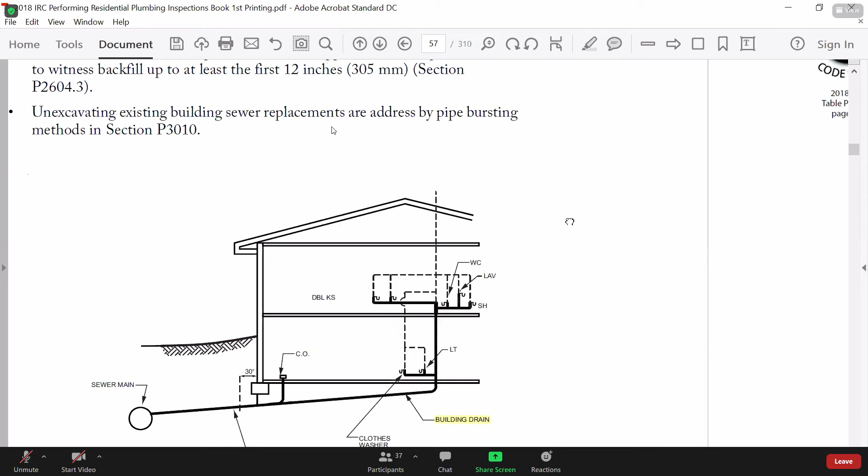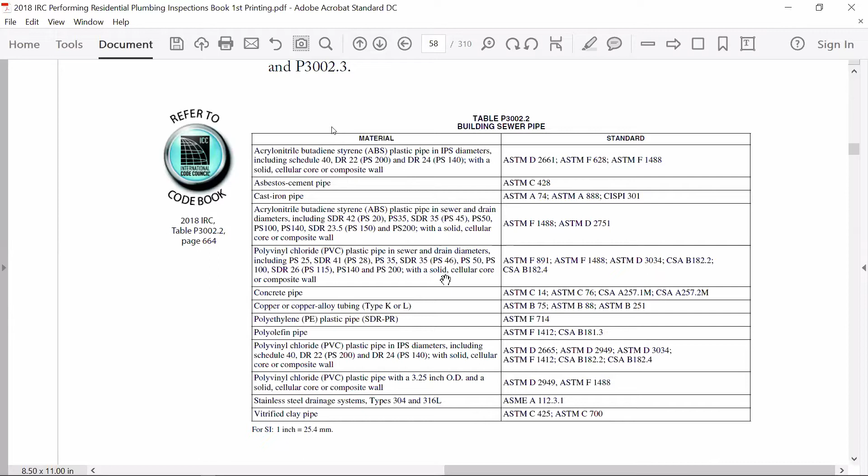So you ask yourself, step one, can I use a certain material? Here's that chart I showed you, that table, when we were talking about the water service pipe in the same trench with the building sewer. You can't use this table if you use vitrified clay pipe, remember. But if I just have a trench for the sewer pipe, not worried about the water, then I could use any material here according to this table, because it's titled Building Sewer Pipe. Where do I find this? Chapter 30, table number 3002.2 to be exact.

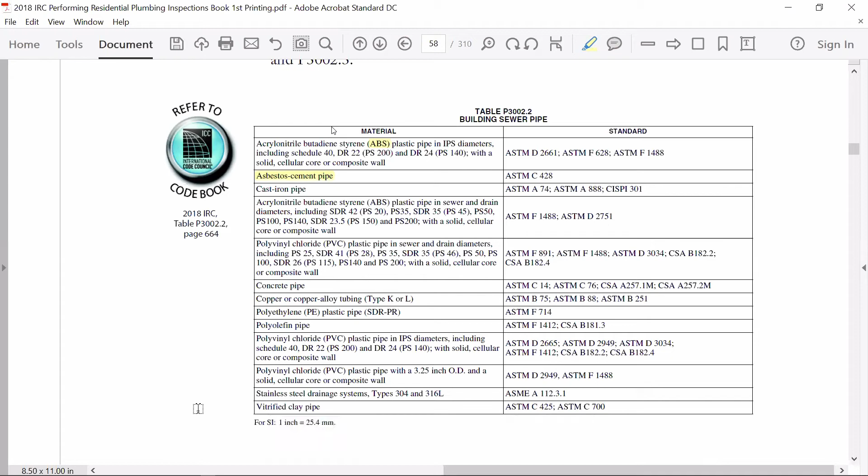So you say to yourself, what type of piping can I use for my building sewer? ABS? This has been eliminated. Somebody check this table, see if that pipe's still in there. Anybody got a code book? If you do, check this table. I think they eliminated this. Asbestos cement pipe, they may have eliminated that. All right, let me know. I'll keep on going. We could use concrete pipe, we could use PVC, we could use... hey, where's Jamie at? Jamie, are you still with me?

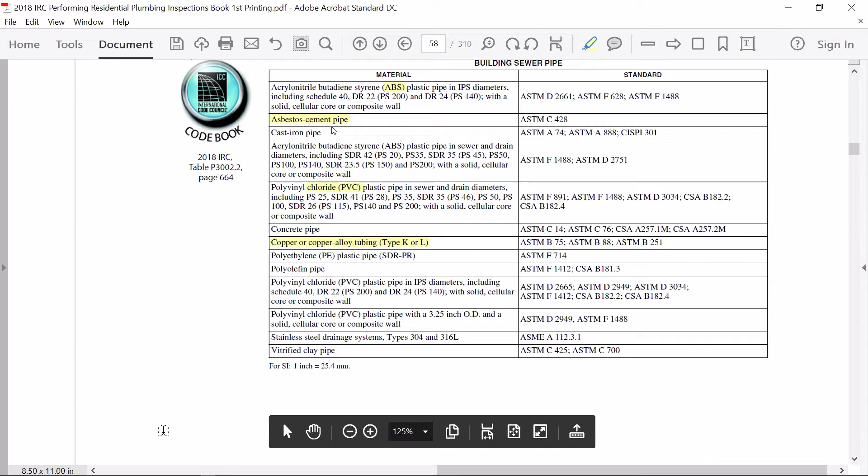Yes, I am. All right, look what I could use here for my building sewer pipe. Remember we had that discussion about copper or copper alloy tubing? Yes. Wouldn't that be an expensive sewer pipe to be used, copper? Like 3-inch pipe? I would imagine so. Yeah, but you know what, I could use K copper, I could use L copper, but you see what's missing here, Jamie? I can't use WK or WL, right? Welded seam cannot be used here. Yeah, very good, it's like it has been eliminated.

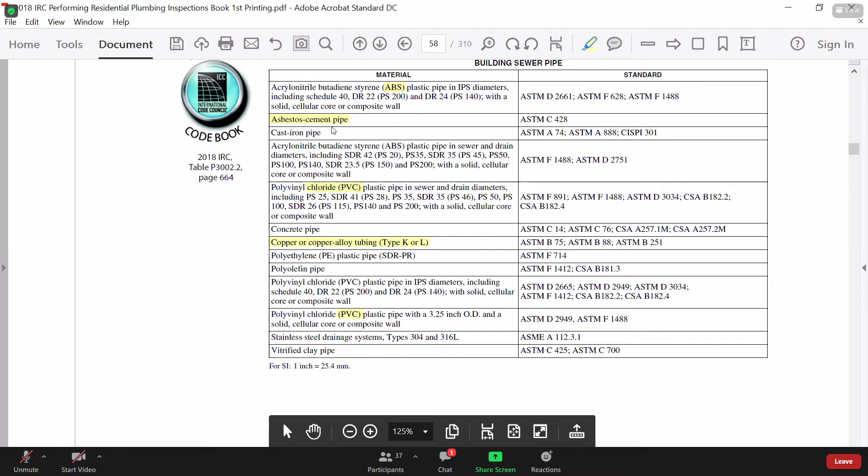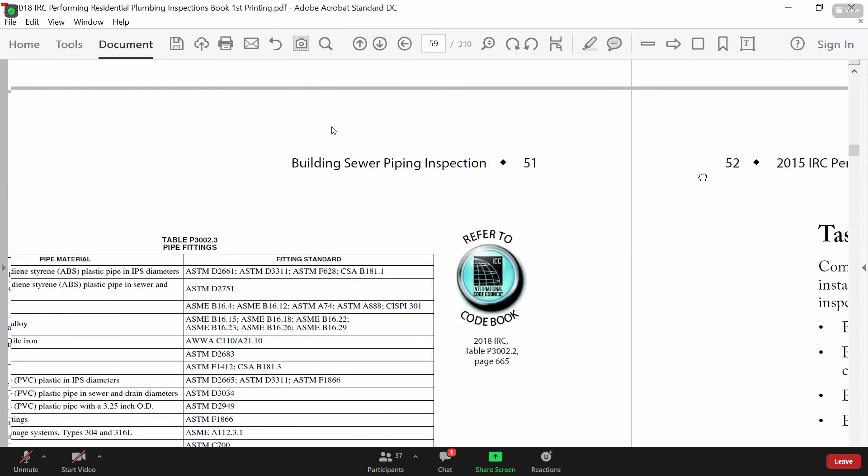Paul, go ahead. The asbestos has been eliminated. Yes, and M has been eliminated too. Excellent. So as you can see, these are the approved materials that we could use for building sewer pipe. As we go along, here is the pipe fittings associated with those materials, as indicated in this table, still in Chapter 30. I'm still given the pipe materials and fitting standards, and I can still use vitrified clay pipe, stainless steel, PVC, etc.

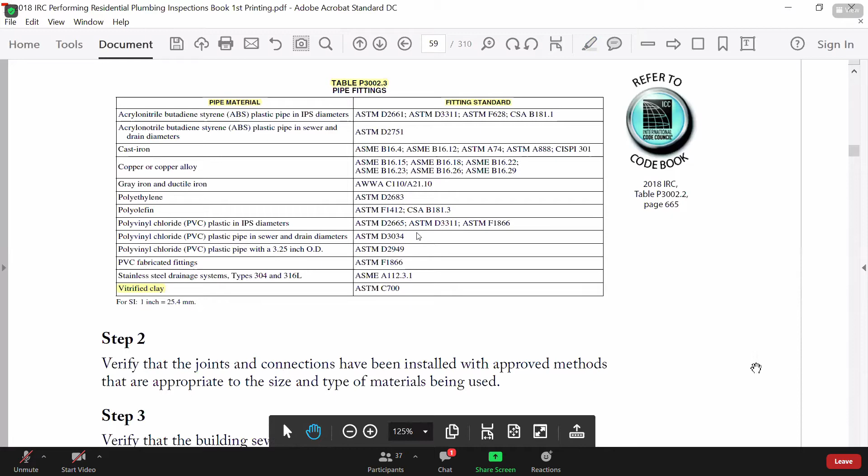Now that's your workbook. You have all this material available in the workbook, and I'm going to get into the PowerPoint here and kind of make sense of this. So we've seen that graphic, we know where the building sewer is, we know where the building drain pipe is. They are two different and distinct parts of the drainage system, right? Moving on, there's our tables, building sewer pipe, the pipe fittings.

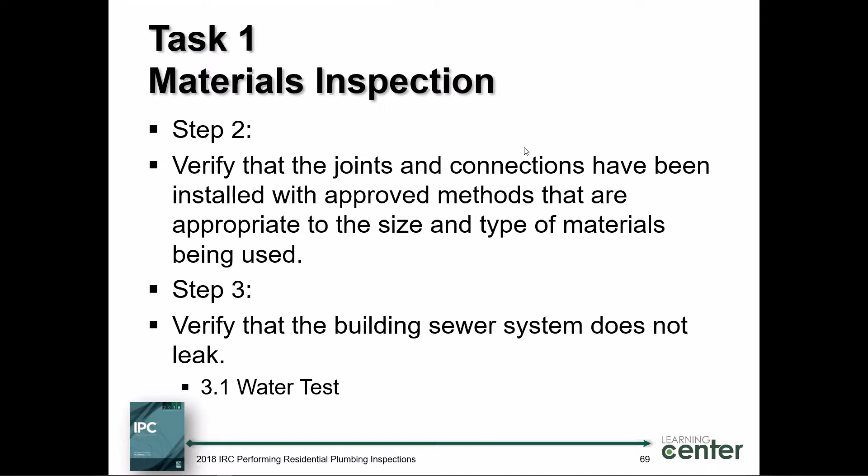Step 2, we need to make sure that the building sewer can be inspected, making sure that it is not concealed, covered, or even put into use. If I'm looking at the approved construction documents, I'm checking the pipe size, checking the slope to make sure it's sloped accordingly, and checking protection from freezing possibly. If I go to this section of the code, it gives me a little bit of insight. So basically, it's recommended that you check with the authority

that has the jurisdiction for building sewer pipe. Now again, this could be your local engineering department, maybe your city engineering department, county engineering department, maybe the building department. I don't know how your jurisdiction is structured, but in any case we're just talking about the model code here. There are no amendments to the code that I'm presenting here. This is strictly right out of the International Residential Code, Chapter 30, Section 3001.2. Here it is: portions of the above grade DWV system, other than vent terminals, shall not be located outside of a building, attics, crawl spaces, etc., unless you protect it from freezing accordingly.

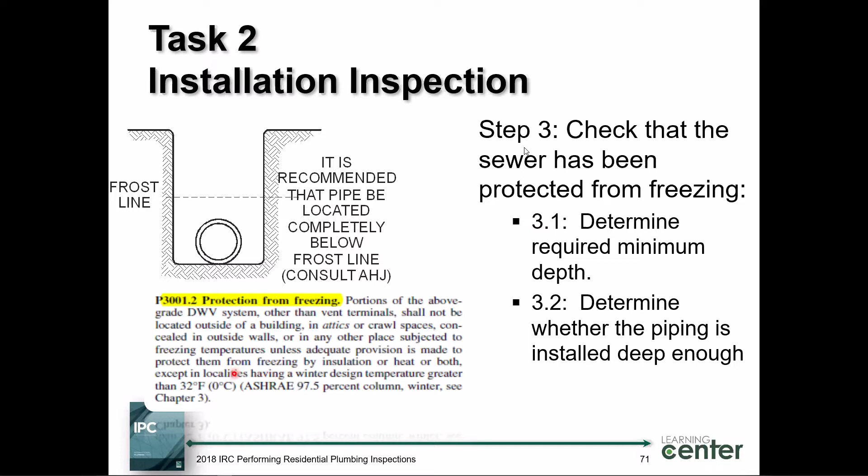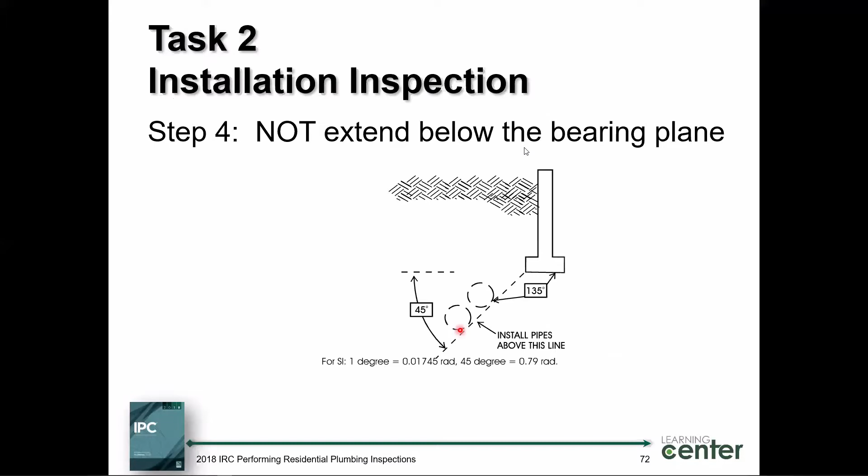Hey, does this look familiar to you? Have you seen this picture before? Carla, smile, have you seen this picture? Right, we've seen this before. We saw it with the water service pipe, didn't we? And now we're seeing it with respect to the building sewer pipe. It's the same thing. Any type of piping cannot pass below that bearing plane, because this is where we resolve the pressures of the building's load into the soil below at the juncture of the footing.

Okay, makes sense? Hey, I was on a job a few years ago, and I figured I'd take a picture of this guy. Look at this guy, he was actually putting in the building sewer system way, way up here in Lake County, Ohio, right? So I figured I'm going to take a picture of this because this is a good picture. I mean, it's the same thing.

We didn't regulate the building sewer in our jurisdiction when I was the building official. We just regulated building stuff, like when it came into the building. However, look what happened here. He put really nice bedding here. Look at that stone, isn't that nice? There's no blocks here. He was waiting for the county to come out.

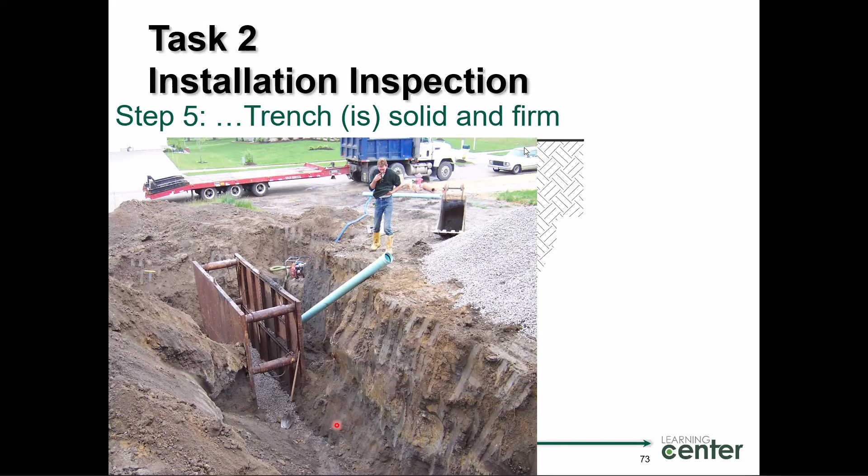Well, he wasn't quite done. He had the trench box in here, he had the pipe. He's just thinking, man, I got to get the rest of that stone in here and put that bedding in. In other words, we need to make sure that when that pipe is placed on the bedding, it is not concealed and it's firm, according to this particular section right here, trenching and bedding.

We've seen this before, haven't we? For the water service pipe, it's the same for the building sewer, 2604.1. So we're seeing some similarities here, right?

I want you to look at this particular table right here. I bring it up for a reason. If you have a code book, find this table, okay? It's table 3004.1. I want you to look for that in the table, okay?

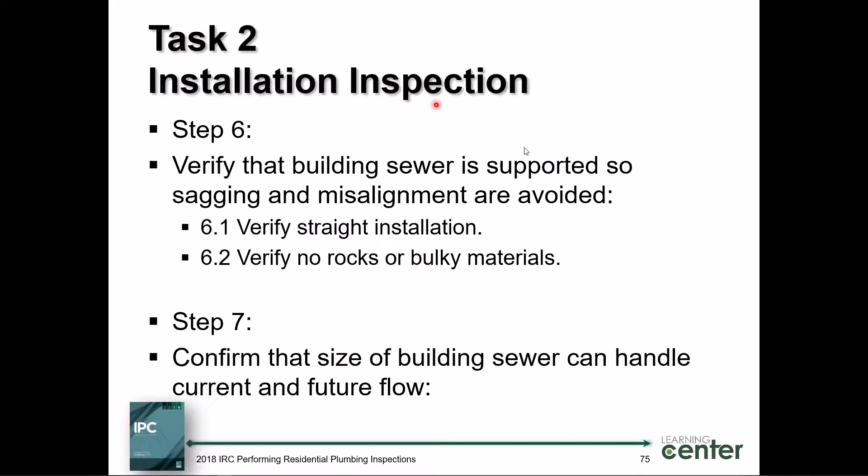And I'm going to go back a few slides and talk to John. All right, you find that table. I'll get my workbook out.

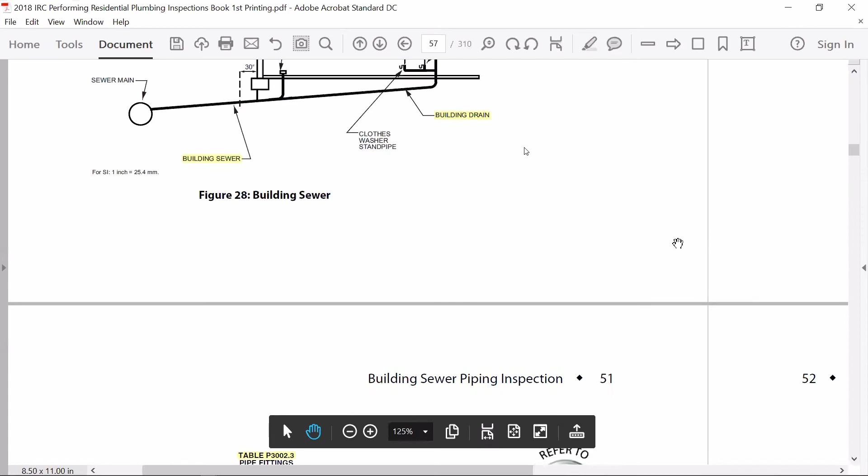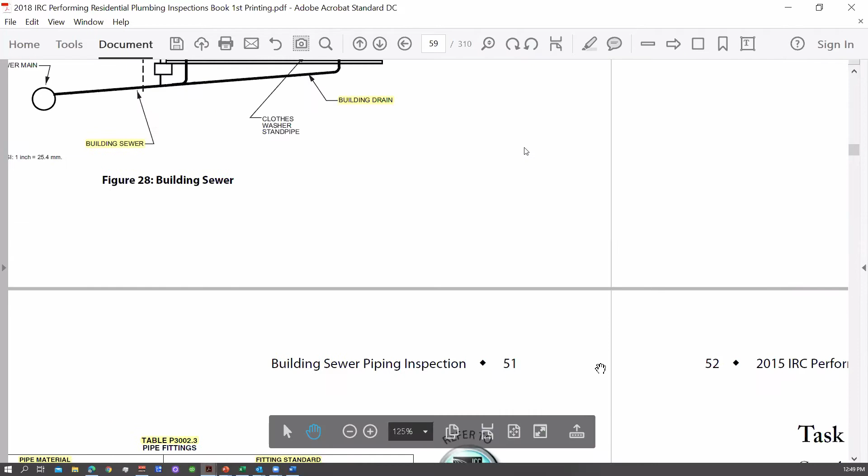John Baxter, good. John, that was eliminated, wasn't it? That asbestos pipe I saw on this table here. Somewhere around here, yep, it was in the top table here. Yep, right here, asbestos cement pipe. Good, so that was eliminated. Thank you, John, appreciate that.

Great, so this table is giving us the demand, ladies and gentlemen. We could use this drainage fixture unit value as the demand for the sewer. We could use this as a demand for the horizontal drain inside the house. We could use this as a demand for any particular type of fixture that you see in this table. Now, is there a definition for drainage fixture unit?

Where do we find such a definition? Did John Gibson go over that with you on the first day? He's a great instructor, isn't he? Chapter 2 in the residential code will give you the definition for drainage fixture unit. What do you think it is?

Let's have a conversation, anybody. You can unmute yourself, go ahead. The size of the drain. 7.5 gallons, I'm hearing gallons, I'm hearing drainage, I'm hearing okay. 7.5 gallons, isn't it? So a coefficient used to determine or to note the demand or the impact the unit has on the system. We use it for sizing lines. Chris, I like the way you put that.

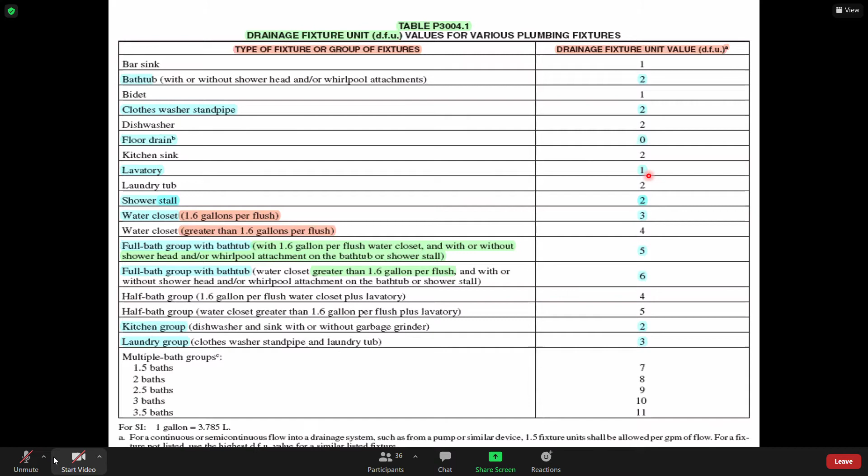There are tables we use to size the pipes. But in this case, we're talking about the building sewer. Now, if you recall, the building sewer takes the whole demand out of the building, right?

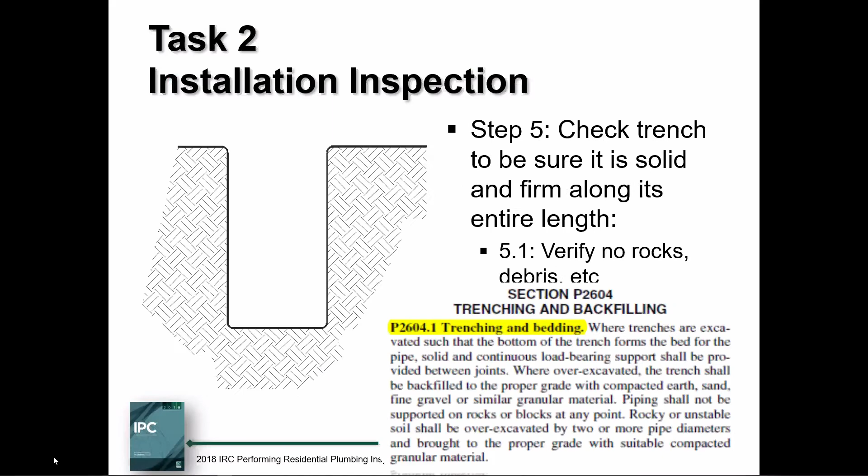If I show you this graphic again, let me go all the way back. I want to put this in perspective for you. Would you agree, ladies and gentlemen, that the building sewer will take the full demand of the whole house? Is that a fair statement?

That's going to take the demand from the water closets, the bathtubs, the kitchen sink, the standpipes, all the way down out of the building. I need to design my pipe for the full demand, no diversity, okay?

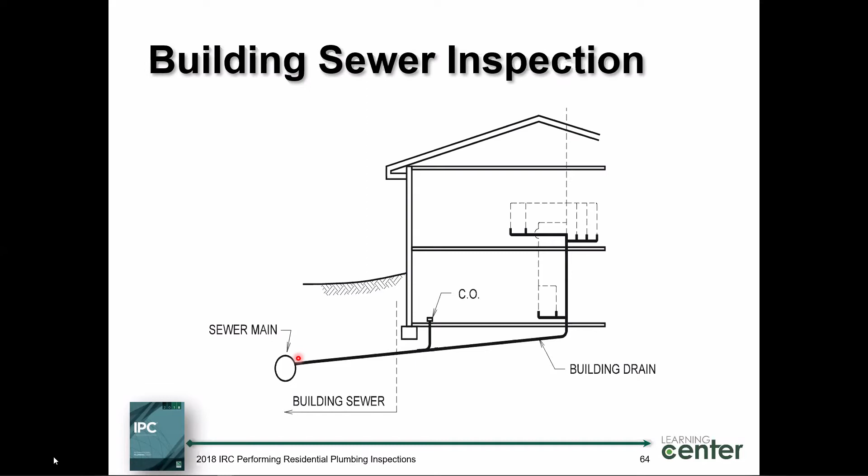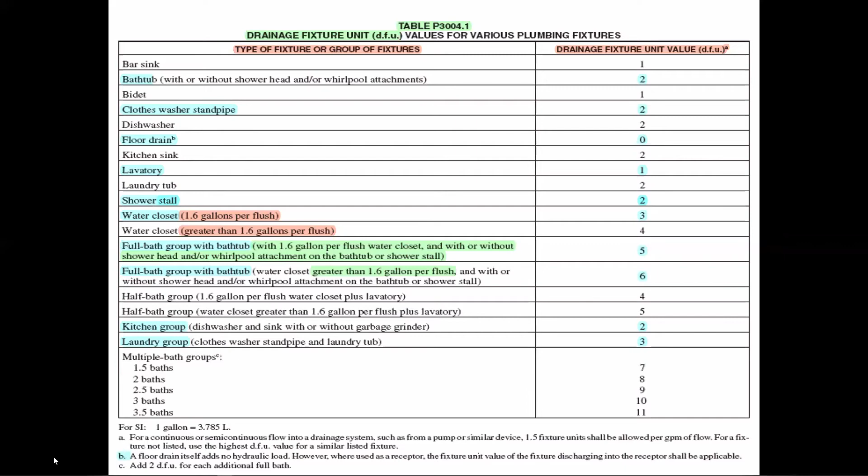If I say that, we know where the demand table is, we could calculate all that stuff and maybe reference a table prescriptively and deal with it. So let's have an application before we break for lunch here, okay?

Examine the slope of a building sewer to be sure it's either 1/8 inch, 1/4 inch, or 1/2 inch per foot minimum as applicable. Now, I've given you a table number here. If you have a code book, see if you can find that table. If not, I'll show you where that's at.

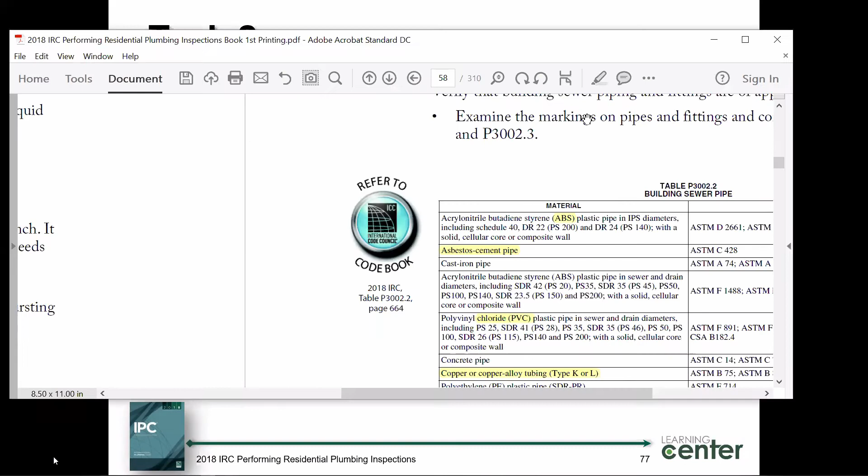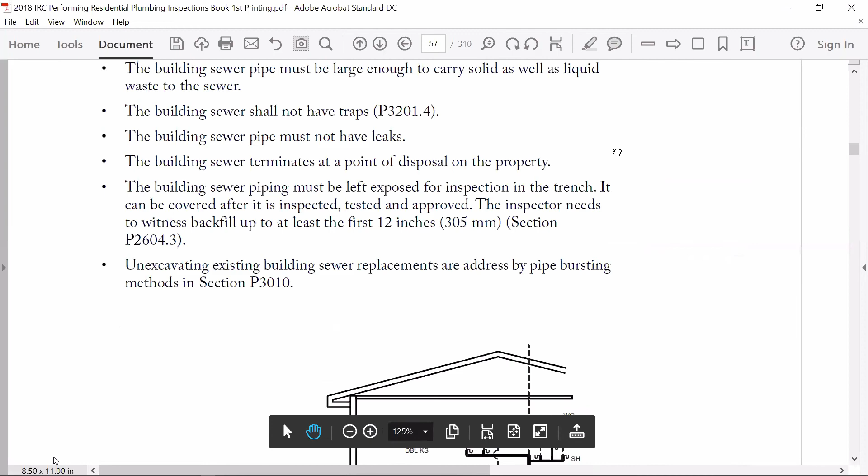As you look in your code book for that particular table, I'm going to advance here and get this graphic up because I'm going to switch back and forth and ask you a few questions. So if I'm a plans examiner in a building department, or an engineer designing the system, or an inspector, I think I should know a little bit about plumbing.

How about you? If I aspire to be a plumbing inspector, yeah, I would say true. I want you to look at this graphic. Look at the type of fixtures I have here. You see this? I got a shower, I got a lavatory, I got a water closet.

Anytime that you have a water closet, you're probably into a bigger pipe size, right? Than say a lavatory or a shower. I'm going to make another statement here: you can never, ever reduce the flow or reduce the pipe size in the direction of flow.

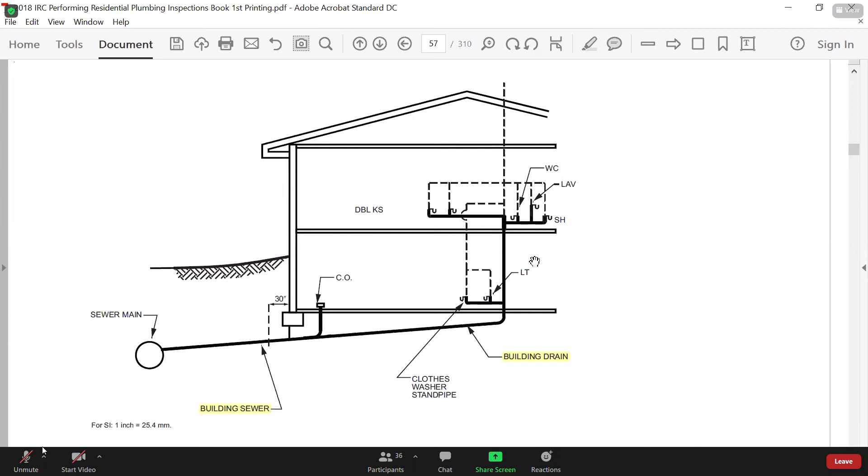I'll say that again. You can never, ever reduce the pipe size in a drainage system in the direction of flow, period, end of story. There are only 2 exceptions, and I'll show you where they're at. Remember that: the pipe size must remain as large as possible, period, all the way out of the system.

Now, what did we show you here? We showed you some of the fixtures here. We showed you that I've got a building drain here, and the full demand of the system dumps, of course, into the building sewer. So here's our application, ladies and gentlemen.

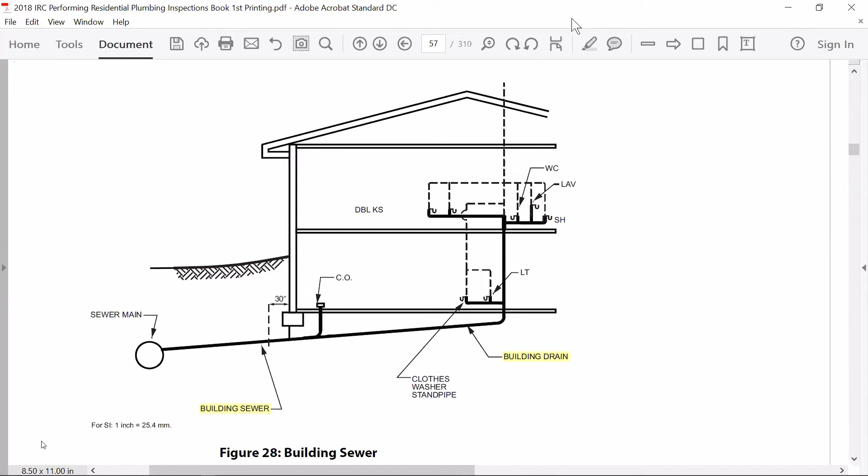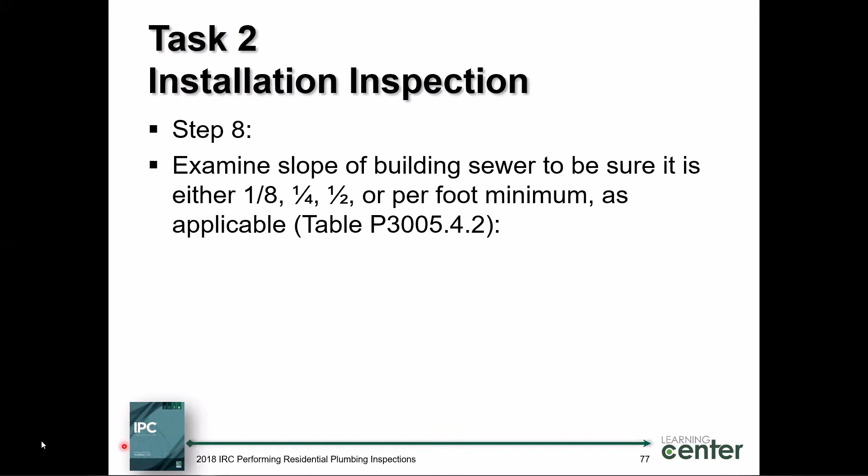I'm going to first read the table to make sure I'm in the right table. I don't know if you're like me, I pick the wrong table periodically. It's embarrassing, but I catch myself every once in a while. You need to look at the table.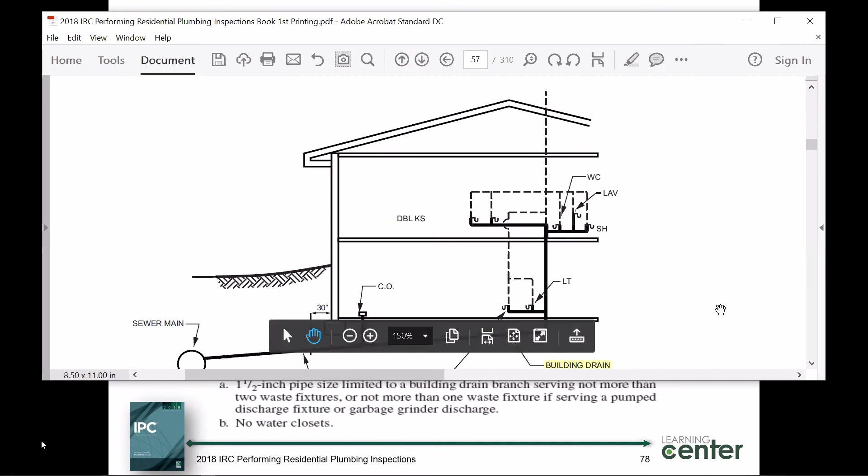Now I'm going to give you an example. Let's go back to my graphic here. Let's say I calculated a demand flow on my building sewer all the way down here for a total demand of the system of 19 drainage fixture units. My whole house calculates to 19 drainage fixture units.

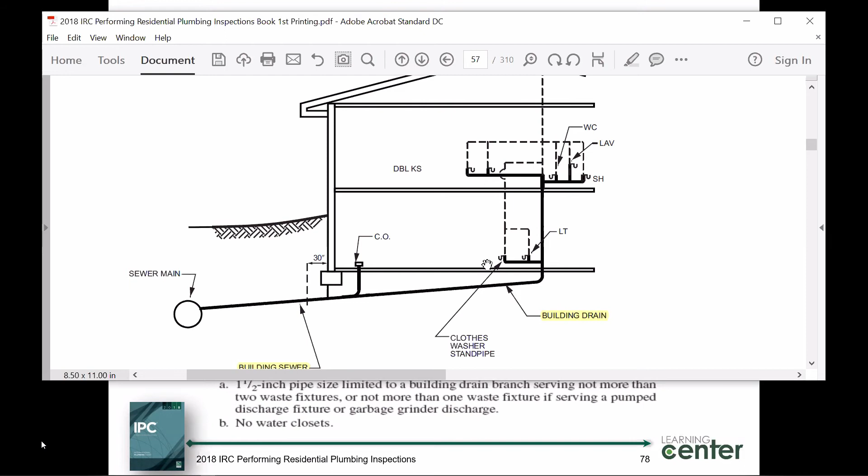Now look here, I've got a water closet, one toilet. I've got a lavatory, a shower, maybe a couple other things here, laundry tray, things of that nature. So you're with me, right? 19 drainage fixture units.

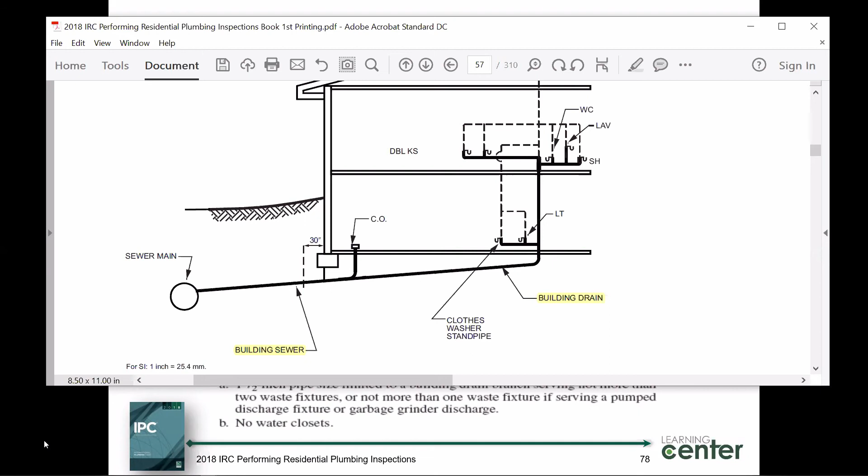Let's size the building sewer based on a slope of 1/8 inch per foot. That means it's going to pitch downward 1/8 of an inch per linear foot of horizontal length. 19 drainage fixture units, 1/8 inch per foot. So we come in here and say, okay, 1/8 inch, 36. Well wait a minute, that puts me at a 3 inch pipe. That'll carry the demand, but my demand's only 19.

Well wait a minute, let me go to 1/4 inch. What if I went to 1/4 inch slope, which I can do? Look at this, a 2 inch pipe will handle 21 drainage fixture units. I told you the demand for my house here is 19 drainage fixture units.

So, no water closet though. What do you mean no water closets? I got a water closet right here, Francisco. Footnote, look at the footnote. Oh, there's a footnote? Yeah, I think you're exactly right. Look at the footnote, Francisco, you get the gold star for the day. Everybody look at the footnote.

It's an application of the table. You are never, ever allowed to use water closets when you see footnote B. You see what happens here? Your water closets have an outlet of 3 inch or maybe even 4 inches sometimes, but normally they're 3 inches accordingly. Case in point, I need to use a 3 inch pipe. So it goes back to my original design. If I slope it at 1/8 inch per foot, I can carry 36 drainage fixture units, but the minimum size pipe I could possibly use on any single or 2-family house is a 3 inch, provided you have water closets. Does that make sense?

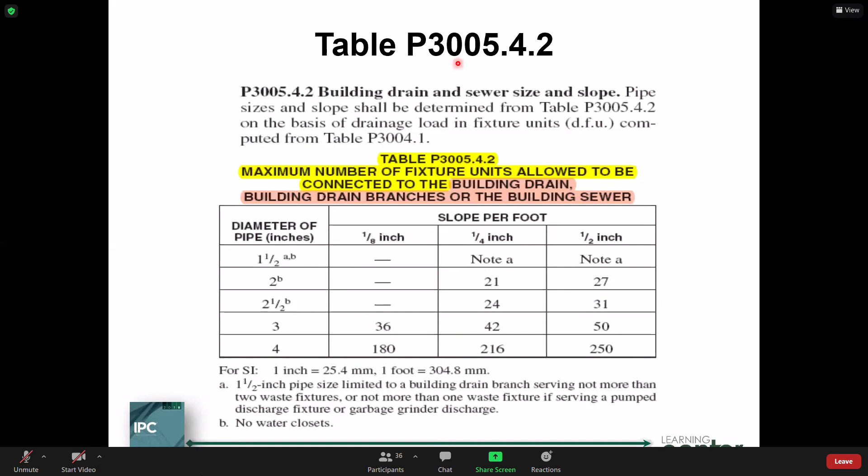Okay, we used a table here to take a demand and size the building sewer system. And Francisco, there you are right there - you're exactly right, you always, always read the footnotes accordingly.

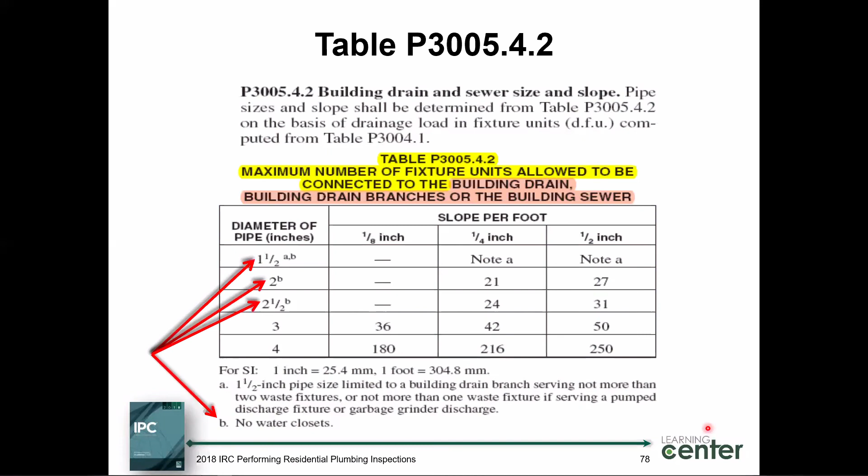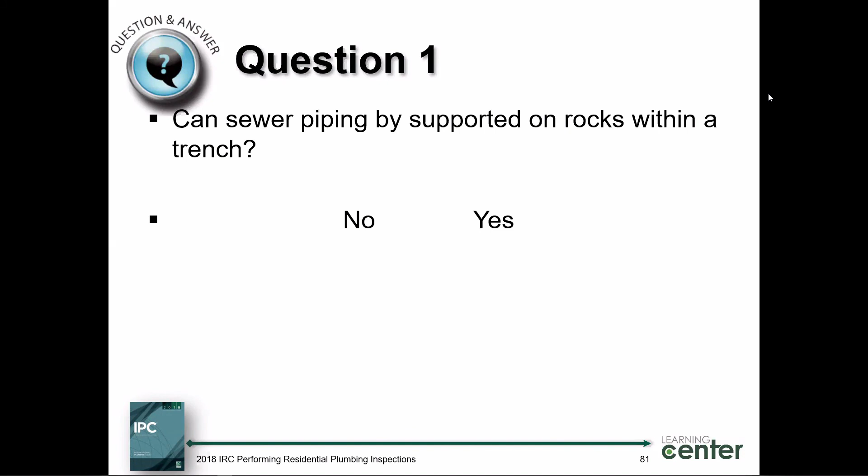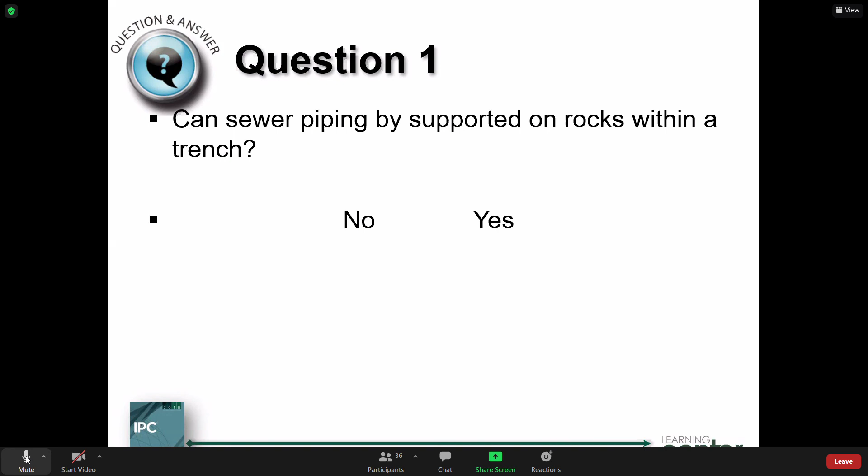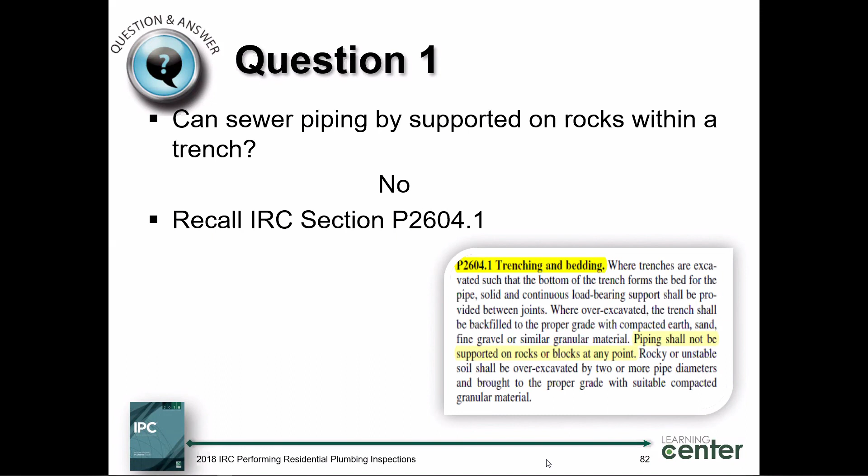Question number 1: can sewer piping be supported on rocks within a trench? Absolutely not, and there's our code section. Do you see it's coming up like a bad habit all the time, the same code section? 2604.1. I want to go on Jeopardy, and they're going to ask me, Jerry, can sewer piping be supported on rocks? I'm going to say absolutely not, because Don told me to go to chapter 26, specifically 2604.1.

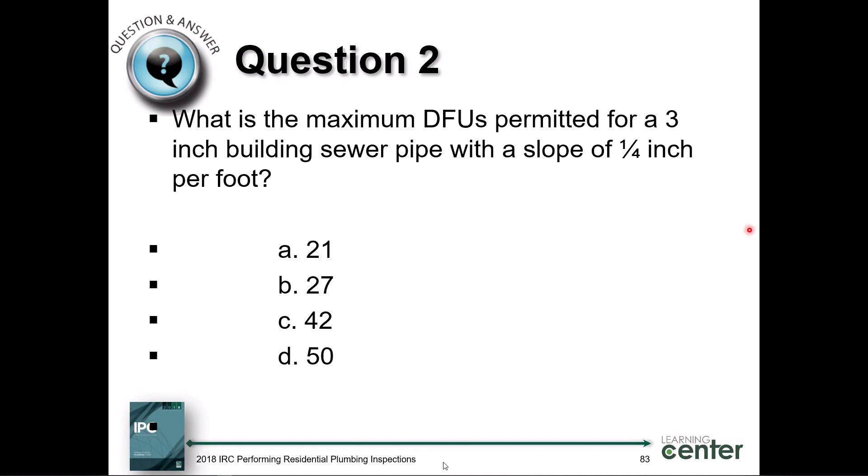There we have it. How about this one? Ooh, this is a good question. If you have the table in front of you, what is the maximum drainage fixture units permitted for a 3-inch building sewer pipe if I'm sloping not 1/8 inch, but 1/4 inch per foot? Do you have that table available? 42. Is it A 21, B 27, C 42? 42, C. All right, I'm with you.

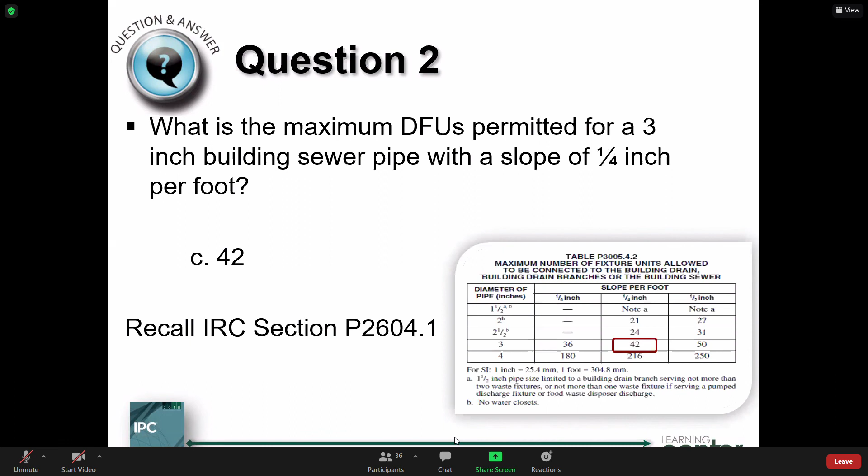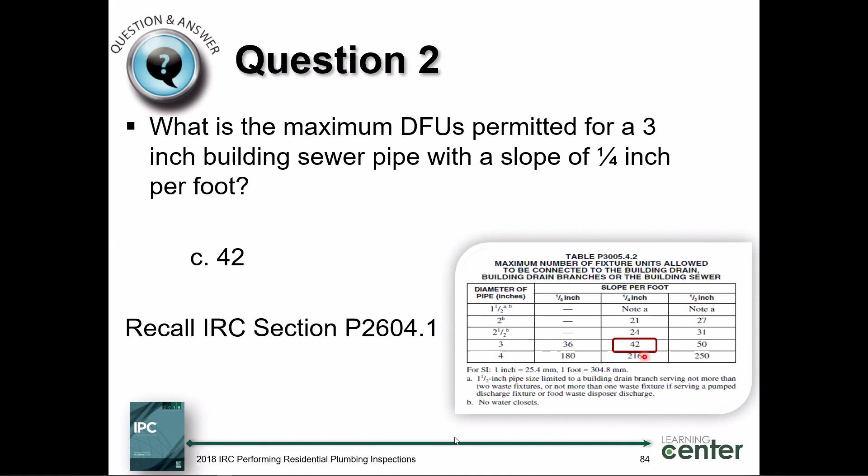Let me get that table up here. Let me click this, see if I got the table. There we go, right there. Simply 1/4 inch intersected with the 3-inch pipe, you have the demand capacity of 42 drainage fixture units.

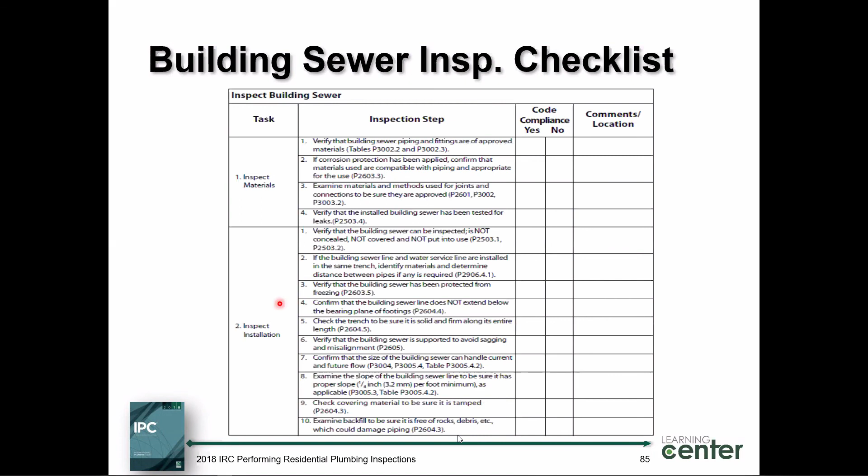Great, excellent. Last but not least, you have a checklist at the back of your workbook. Utilize this if you're a building official, plumbing inspector, plans examiner, et cetera. Again, we have all the little code sections embedded here based upon the inspection task or the plan review task. Man, that puts us perfectly right at this portion to discuss after lunch. I think it's lunchtime, don't you?